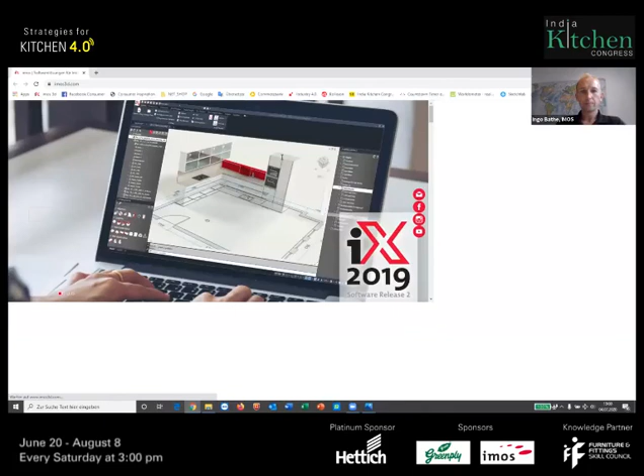For this, I just open a browser, and we have a password and username where I can log in. This browser, or the sales option, can be used on a tablet computer, on a smartphone, on a computer worldwide — it doesn't stick to a place. You can use it from all over the world because everything is online and you don't have to install any software in this case.

If I like to customize a cabinet in a very simple way, I could just open my basket here and ask for a new one, IKC 2020 for example, and I can create my own basket. Now we can see a basket list, a name of cabinet. I can choose part of my furniture, and I just use a cabinet by itself. This cabinet can be customized according to the catalog content, according to the options a catalog can get.

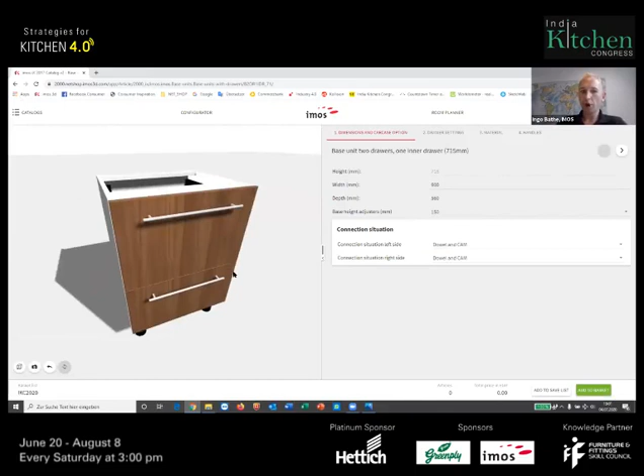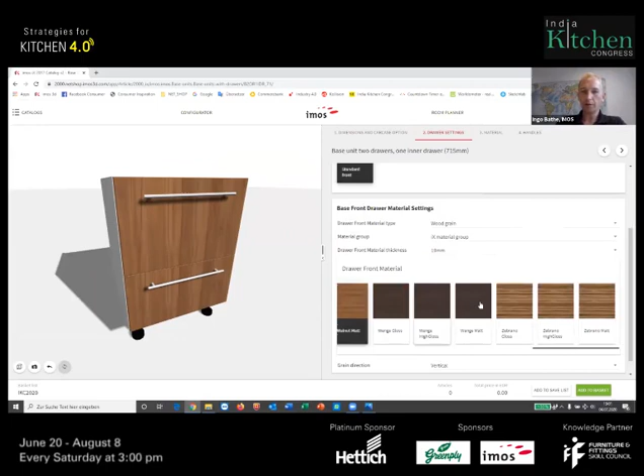So here I can try to make a cabinet which has a size of 888 millimeters. I can change my drawer information, choose a two-side drawer system from Hettich for example, and I can also choose my different panel information, let's say from Greenply. I can choose the different handles.

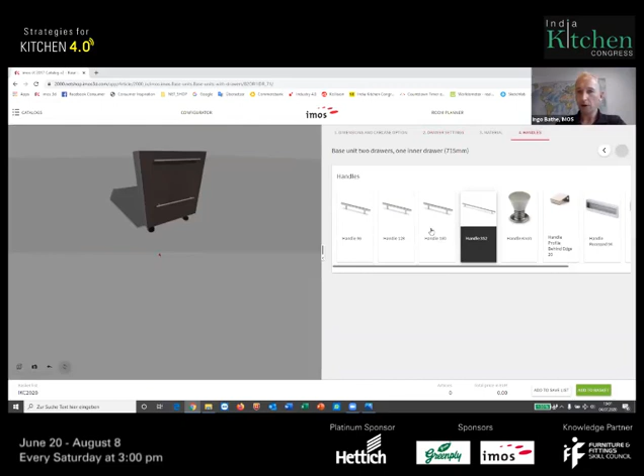This could also be customer specific data — some Hettich handles are involved in this case, for example. Now I can see exactly the same cabinet who has a bigger size like before, and also the internal hardware is changing, because if I change a cabinet from 600 to 888, the slides, the hardware information, and how many kilograms belong to the slides have also been changed.

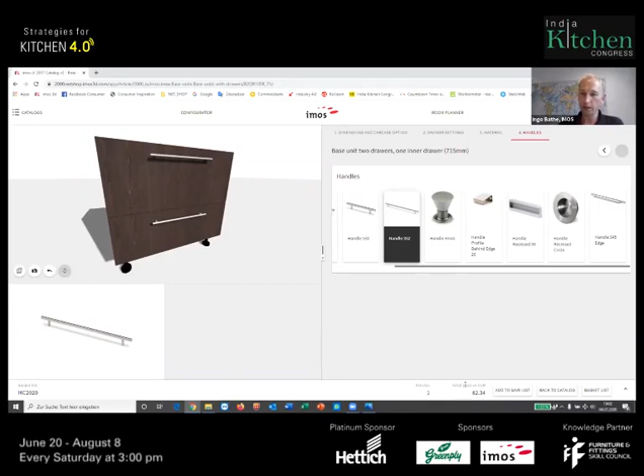I can add this cabinet to the basket, and now I will get an article and also a price for this cabinet automatically according to my new size, new colors, and also my new hardware.

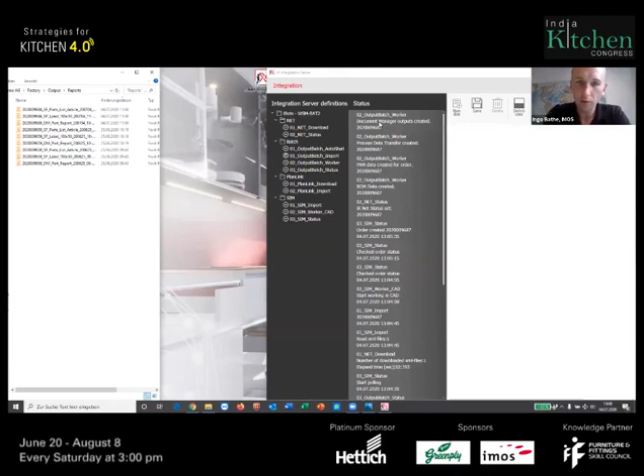It is working like, you can say, a black box. And after it is finished, it will have created all those data. So we can see now in this integration server definitions that we have created the process data, the documents have been created, and now, after the documents, it will create also the reports.

So we can see here in the left folder, in a few seconds, that here are some more reports flying in with the number 687 in the end. And this is totally independent of the production people.

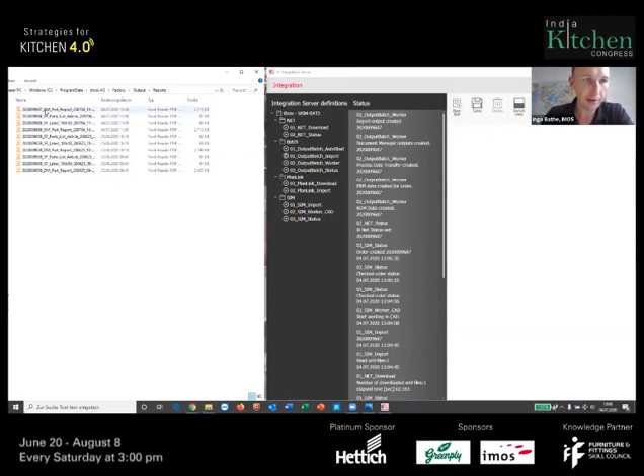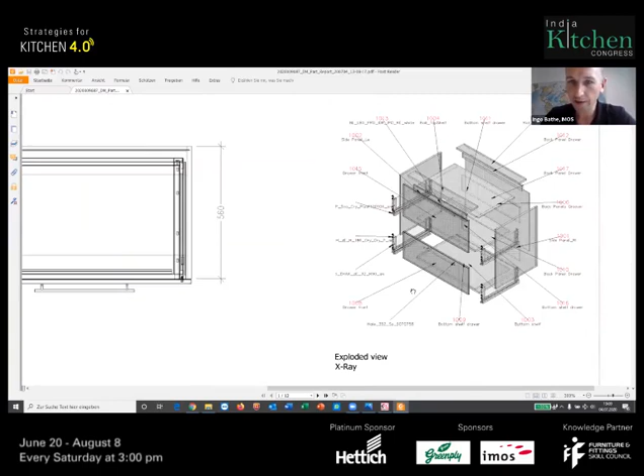So now the first report has been created. We can look here. Here it is, 687. I just open this 687. And here we can see it is our cabinet, which has here an explosion view with all the panels which belong to this specific cabinet. We can see here it has the number according to the online business.

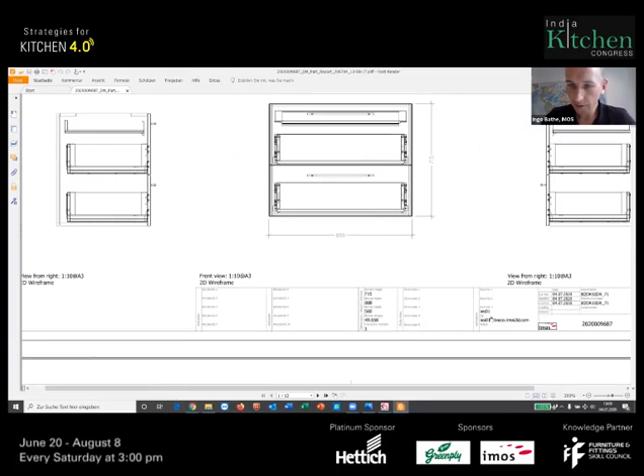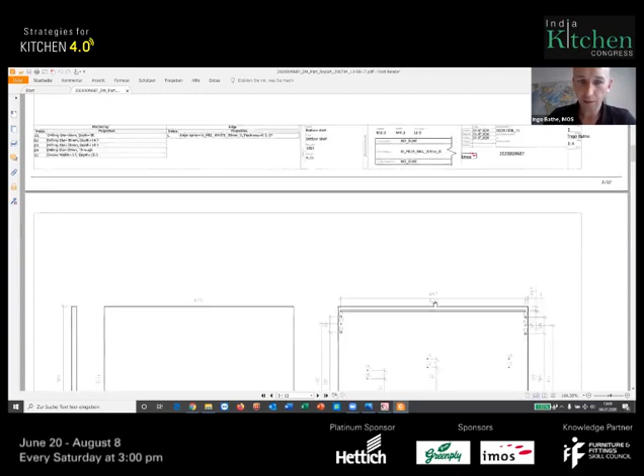We can see also here the specific drawing of the Hettich hardware. We can see here also again the order number, the online user, and last but not least, it will create the single part drawings with all its fittings, with all its drilling information from the internet.

What we can also see is that here we've got the drillings from Hettich. The drilling information is coming from the supplier. So whenever Hettich creates a new article, a new slide, we load the slide in a digital format into our library. And once it is in the library, it also has the technical specification of what kind of drillings are needed, how big those drillings are, and how they are positioned. And once we have this in a digital format, we can use it online or in our production all the time.

So here we can see we have here barcode number 1001. If I go back to my CNC files and open this 1001, here is the 1001 created today at German time 106. I can open it.

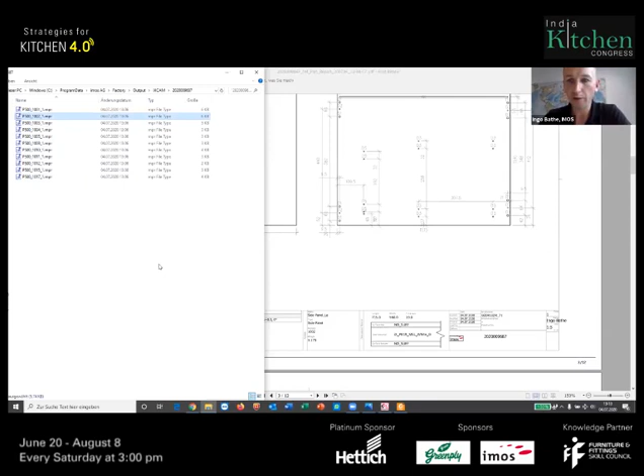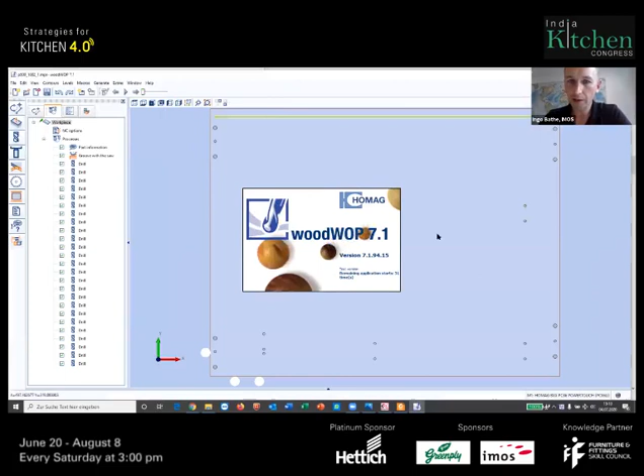And Imos will deliver those data directly to all the machines which are part of the customer's production site. In this case, I have used a Homag machine. Here we can see that those drilling informations created from Imos have been delivered to the CNC machine with all its specifications.

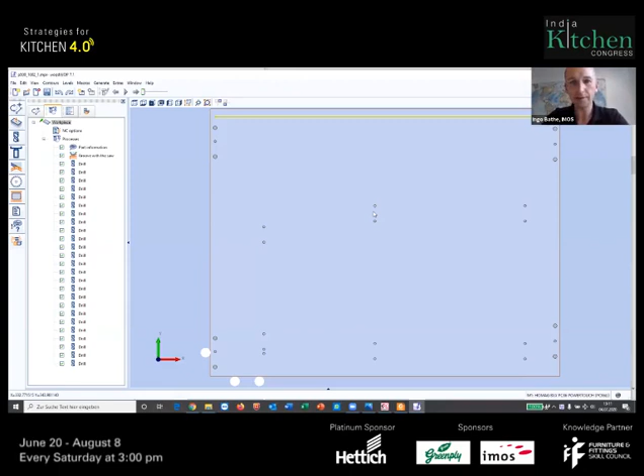So here are the drilling informations for the CNC machine. These drilling informations are linked from the supplier industry, Hettich, to the database of Imos, and from the database of Imos to the sales option, and from the sales we get the specification of this specific cabinet, the customization, and we get back the process information for our production.

This is a small way of how to order online cabinets and get these files automatically downloaded into the production site. It is just one cabinet.

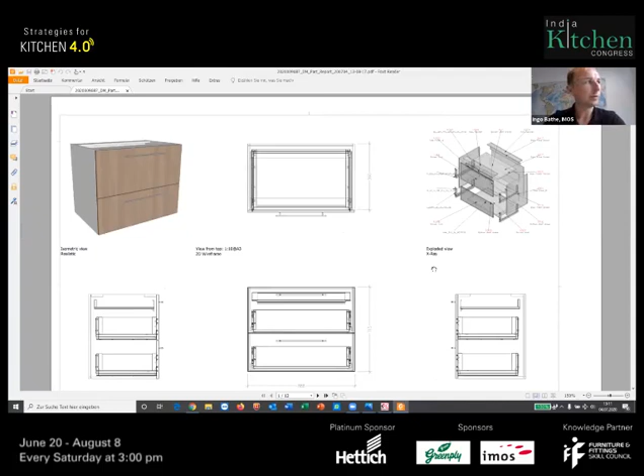The next thing I'd like to have a word on, I was showing here the online shop, customize a cabinet. We also have an offline shop, let's say a solution for a shop in which we can have much more options. This will now be the next option specifically for kitchens, because we are talking about kitchens today and how we can increase efficiency in kitchens.

For this, again, I start my software, which is now installed in my computer. In this software, we have all the options of a room planning function, of a customization of a kitchen, and also of just designing something which is unique, which belongs to our customer.

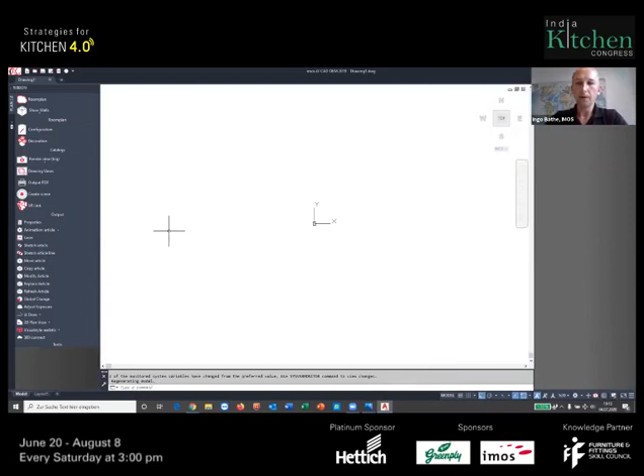I just have to organize my frame a bit. The first thing I will do is, if I like to start designing a kitchen, I will start with room planning functions. In this way, Imos offers a lot of options. We can create a new room, use a polyline from an architect or information from a customer, make a rooftop, make single doors, walls inside, as well as corners, chamfers, and so on. All these options are available, but to keep it a bit easy, I just start with a single floor plan.

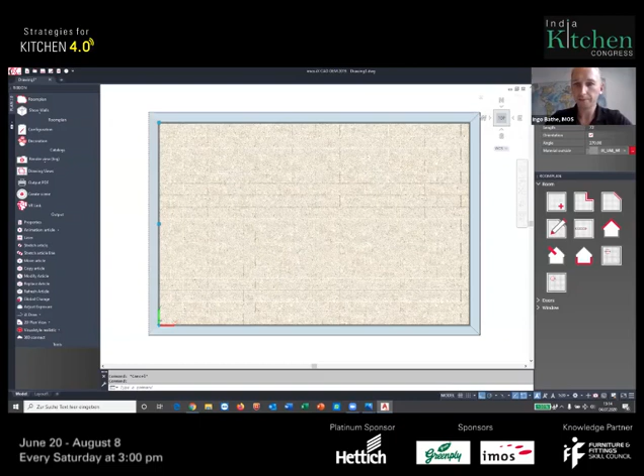I can change here my floor material according to my list. I have a lot of options available - I can have a carpet, a beech flooring plan, or Italian tiles - and I can tick to my different walls and modify it. Let's say 7,250 millimeters for the length, and the same I can do for the width, 5,500 for example, and automatically it creates the room.

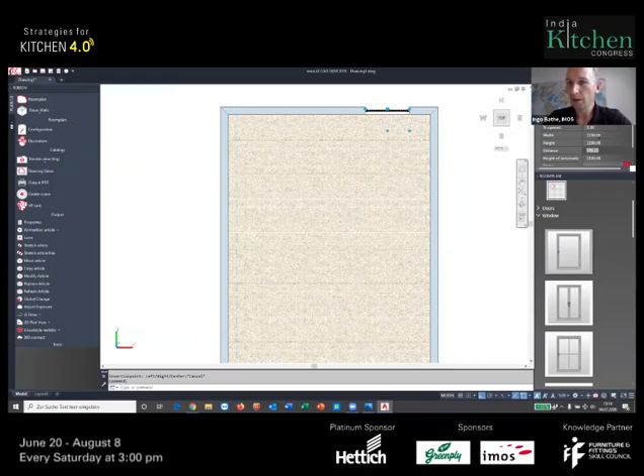The next thing we need is a window, for example, inside. I just tick to a window and place it into this room. Same with the window, I can modify its position, let's say the distance to the wall should be 950 millimeters, so the window moves along. And the width of the window, let's say 900 millimeters, and the height, and so on.

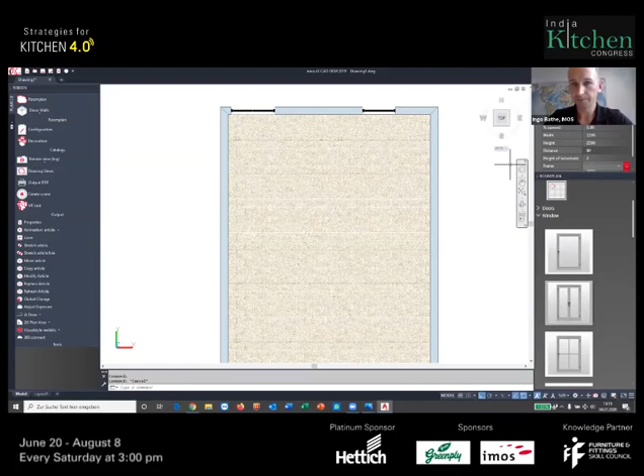I can add on some more windows inside. I can tick to the window and say this should be a much bigger window, a walk-through window, with a width of 1.2 meters, for example, and a distance of 80 millimeters. Whenever I have set up this window, I can multiply it along my needs.

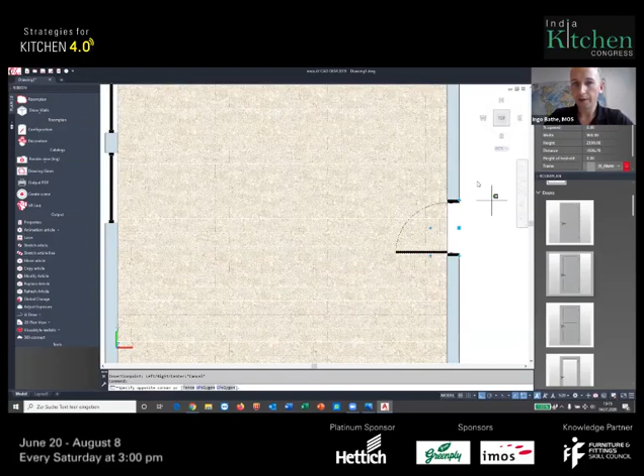We can set up a door inside and have a door involved. Again, I like to change the door from the left to the right side, and in this way I have my room available. Quite simple, quite easy. I can tick to the walls and change the different colors if I want to.

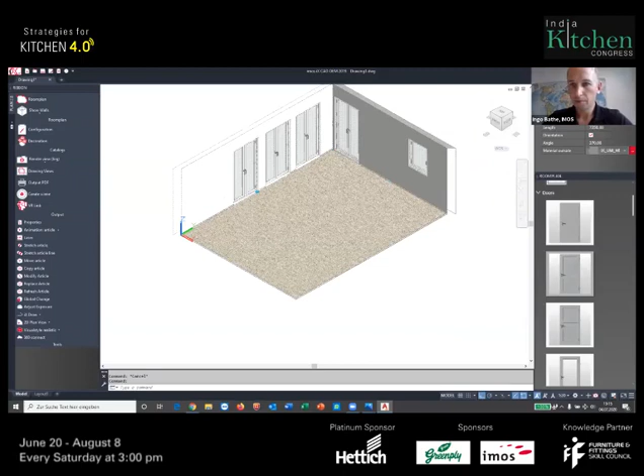And in this way, I can customize a complete room. Next, I'd like to involve a kitchen.

For this, we just open our configuration here. Now the important thing is that in this kitchen we have exactly the same units which we have seen online. Remember, when I start the online configuration, I just choose a base unit—exactly the same data can also be used in a shop. So again, we have one database with all the information from the supply industry as well as the machine industry and our product portfolio, which are flexible in size.

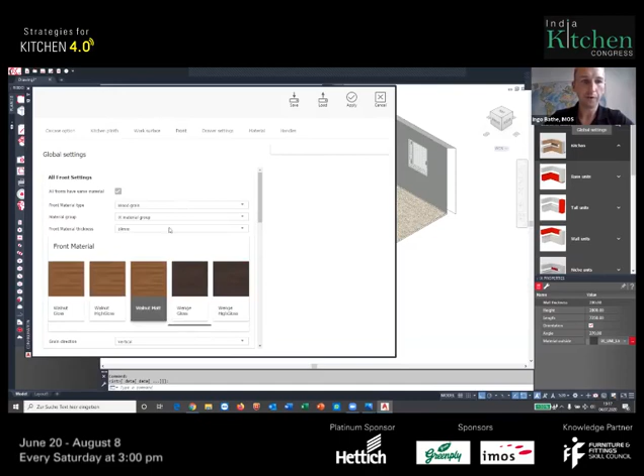The first thing I can do is set up some global settings. I can say I'd like my kitchen plinth in a white panel, and choose different types of surfaces for my worktop: stone, metal, wood grain. I can also choose the type of door or front material—here I'd like some high gloss, let's go for lava, for example. I can choose my handles and save this. Now this is my pre-definition of a kitchen.

Now if I'd like to make a kitchen inside, let's say we have a kitchen line plus an island, which is quite interesting. First of all, we very often have the case that we have some installations like water pipes and so on.

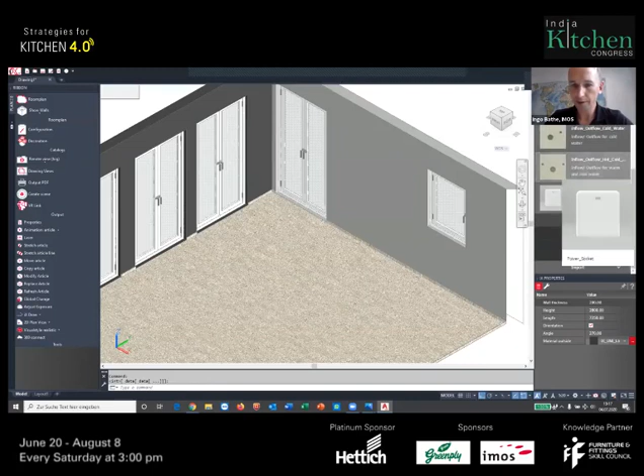For this, we have to go to the options of the wall installations. Here you can see all these installation points. So for example, we can set up a wall installation for water and for gas—important for my installation team later on. The same I can do with some sockets, so here I have some sockets available.

Like this one here. And if I'd like to start designing my kitchen, I go to my catalog and start using, let's say, some tall units. So I can put in a number of the sizes and it automatically starts with the tall units numbers.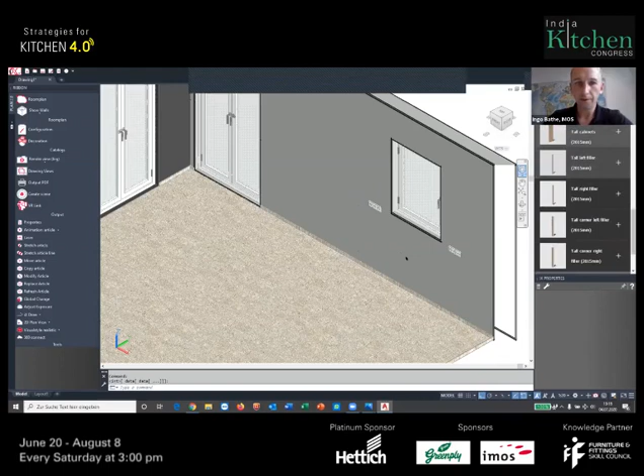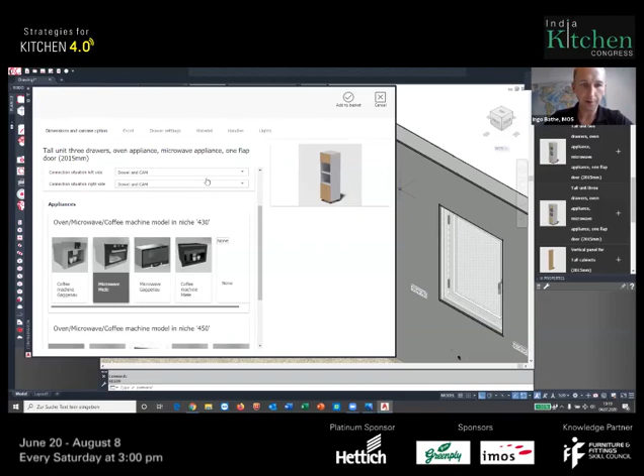I can add a panel here, for example, and place it to the wall, and now you can see it comes in a white color according to my pre-installation. I can choose another cabinet here—I'd like to have a coffee machine involved as well as an oven. This unit should also have some lights on top, and then I can add it to the basket.

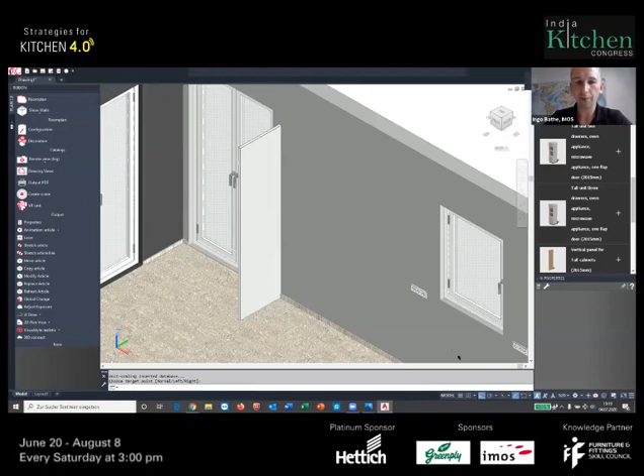And now, as you can see, it automatically flipped together. This way it makes it very easy for us to create this kitchen out of my standard library. And now we also have my high gloss lava panels involved, and here I have my cups, which are part of it.

I add one more tall unit cabinet, and one more side unit, a side panel, just added to this specific kitchen. And now I fill the gap here with some base units, so therefore I just go for the base units.

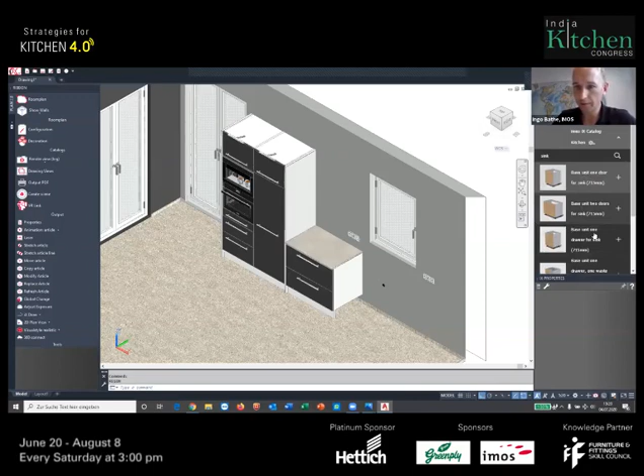And now next, we have here the water pipes, so we have to have a sink installation. Therefore, we ask our catalog, do we have a sink? And then it will list all the options for a sink. So I just choose this sink unit, make it also 900, and I can choose different sinks according to my library information, and add it also to this kitchen.

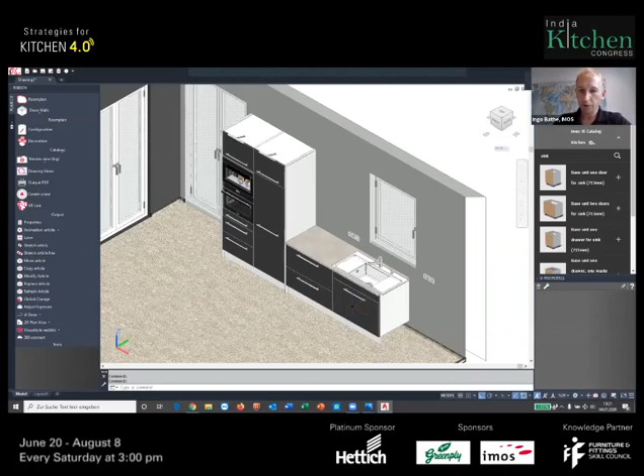And now next, we can see it also gives us a cutout for these appliances automatically. The next thing is I have to fill the gap to the wall. First of all, we have a laser option for this to measure the sizes.

1085—so there it would be interesting to have a cabinet with 1 meter, and we have a filler. So therefore we go for 2 drawer units and ask for a meter cabinet, add it to the basket.

And then we'd like to have a filler involved in, or we just keep the gap, or we just fill it with an additional panel. In this case, I just ask for a filler—there is a right side filler, should be 85 millimeters. I add it to this kitchen, and now this line is complete.

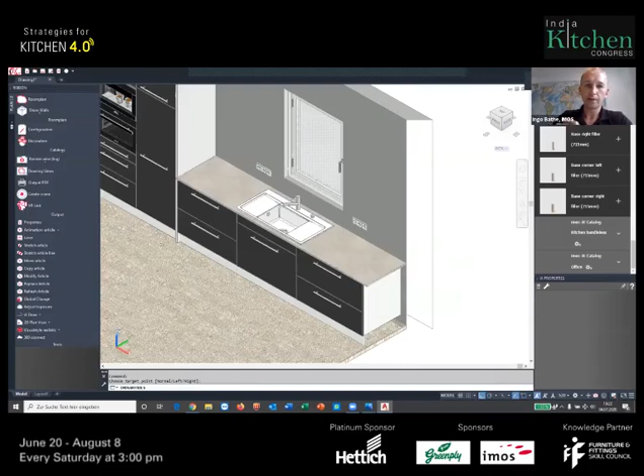The next thing is, I'd like to have some wall units here. Let's say I'd like a glass unit, so I use my wall unit catalog with 2 doors or with a flap unit. We'd like to have some lights involved in, some spotlights underneath, as well as the same lighting on top.

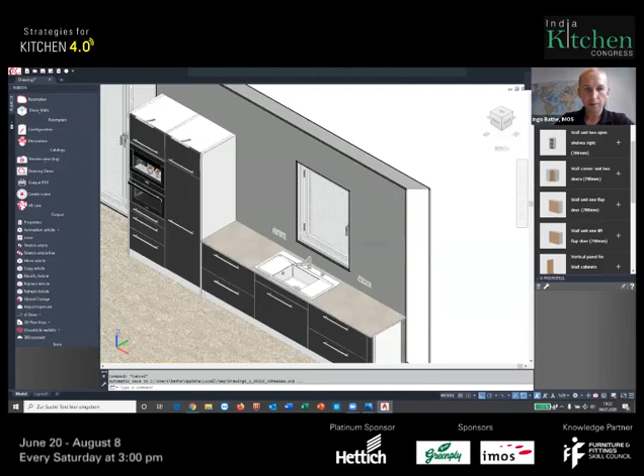I have to move this article. And I would like to have different door materials. So again, we can modify this article here and ask for some glass doors. Automatically, the logic says if I have a glass door, the glass shelves are also involved.

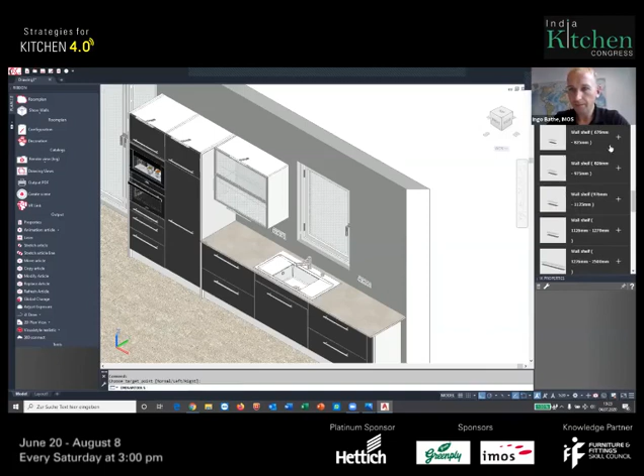And then I'd like to have some shelves also involved in. Look for some wall shelves, number 1 and number 2. And now my first kitchen line is finished.

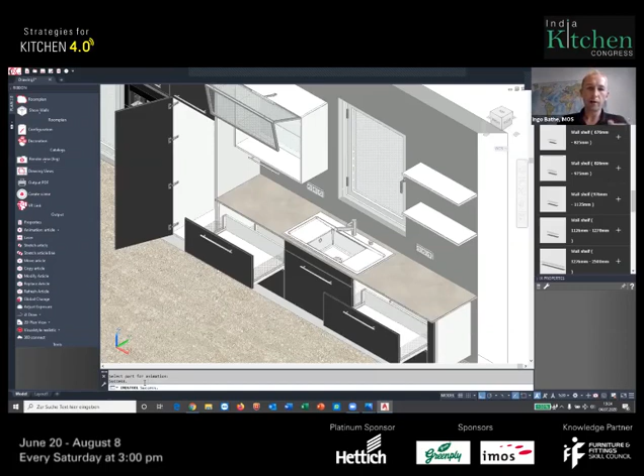Of course, I'd like to have an island too. But what we can do right now is also have a look at what kind of hardware is involved. Here we see there's some Hettich hardware with glass panels involved. We can see the way the door opens, so here are the Sensys hardware involved. We can normally open each and every cabinet and see the movement of the hardware. This way we can demo to a customer how a kitchen looks and how it will work in future.

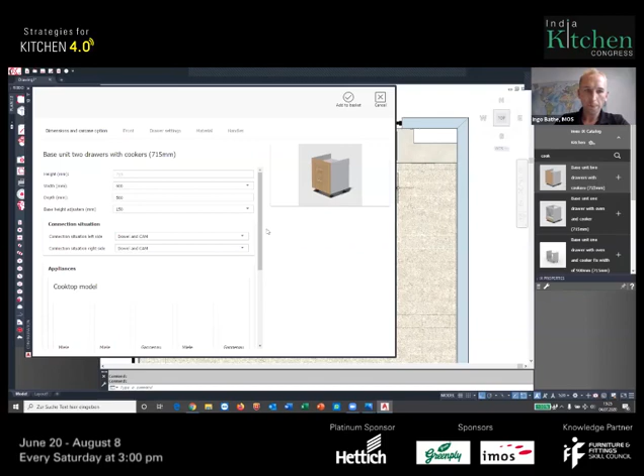I close the articles, and now I'd like to have a kitchen island with a cooking field involved. Therefore, I just go here for a cooking field. It gives me a unit with a cooking field. I can use a Gaggenau, a Miele, a SMEG, or a local one. All these appliances could be loaded into the software.

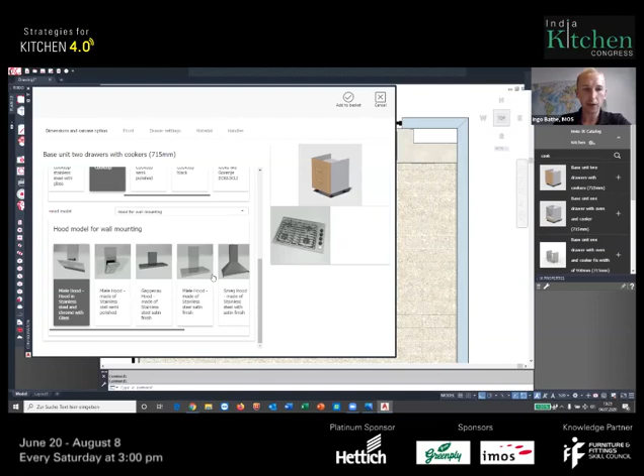We just choose a hood. And finally, we create our island. I place it into the kitchen.

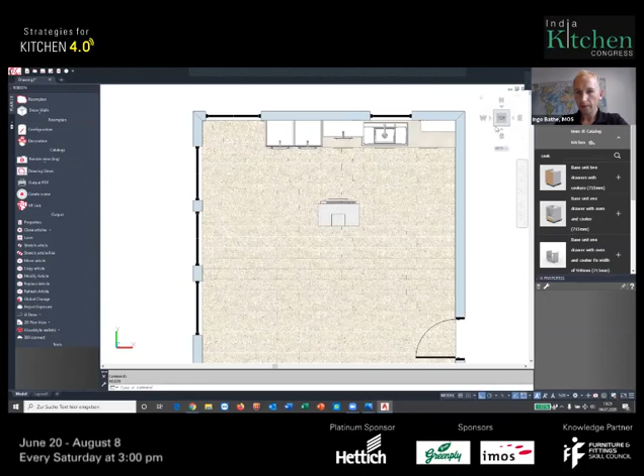Then I just fill it with some different additional cabinets. If I click the plus, it comes in with a standard size of 600. If I click the name, it opens the configurator to have different sizes involved in. So plus is the quick option. Another way is I can open it, and then we get the configurator where we can still change sizes.

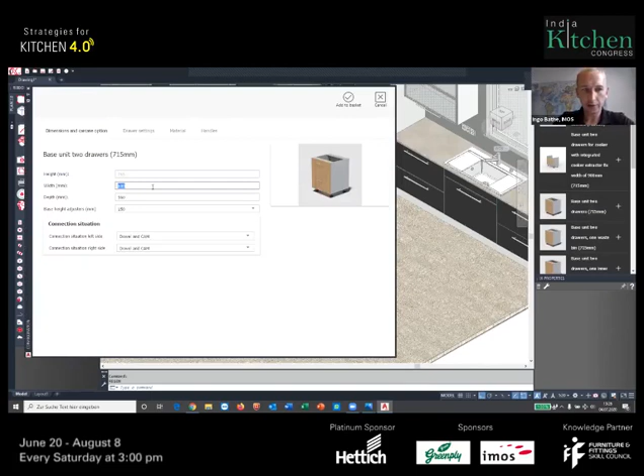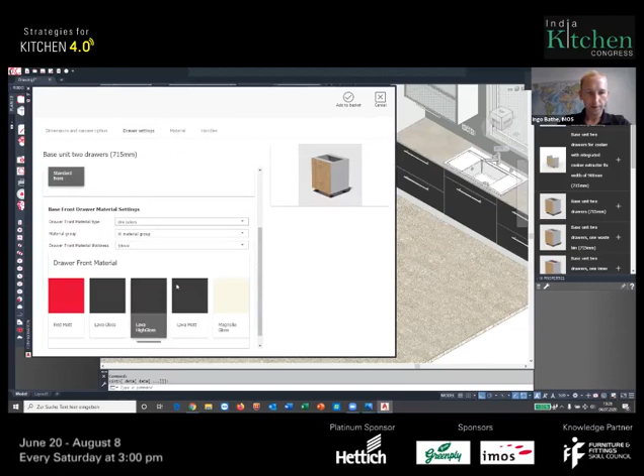I'd like to modify this article to have different material involved in. Let's say some Magnolia front material involved in. So this is now different from the other one.

And I'd like to have one more cabinet with the same configuration, so I just copy this article instead of opening the configurator again, to make it much faster. What we can see also is that the worktop moves automatically.

Finally, we ask for a side panel. We take out this panel here and change sizes according to the island. Just flip it in here.

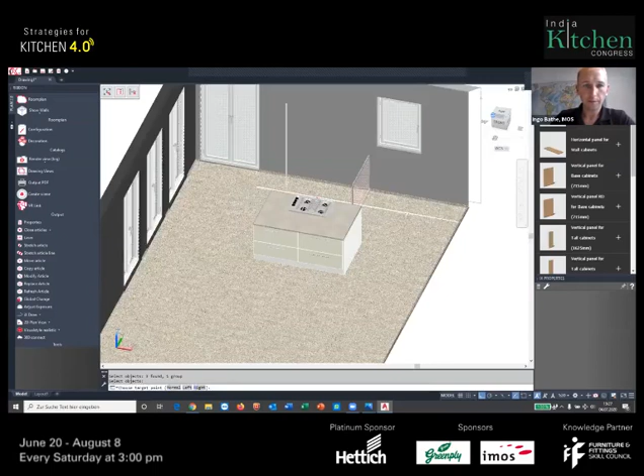And we copy the article and take it over to the next side. And finally, we are finished.

We missed that we have to have some electrical points as well, so I go back to my installation points. I'd like to have some sockets as well, for the cabinets as well as for the wall unit, in order to have the lamps involved in. And now I'm finished with my kitchen.

What I can do now is decorate it and do something more to make a nice rendering. We will do this for a short minute.

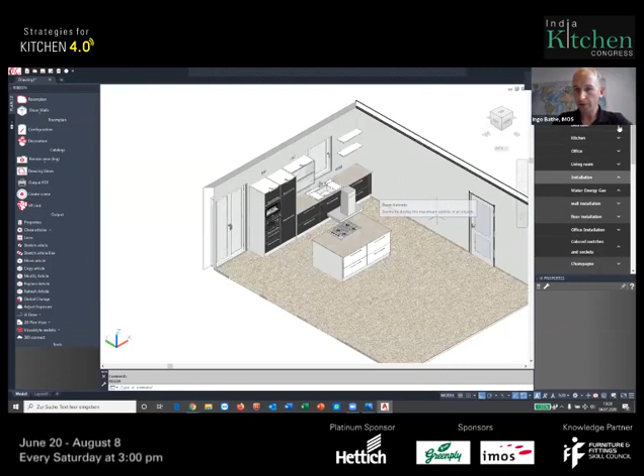We just go for decoration, for example, and ask here for a kitchen decoration. We'd like to have a dining table involved in. Let's take this one here, so there should be a dining table.

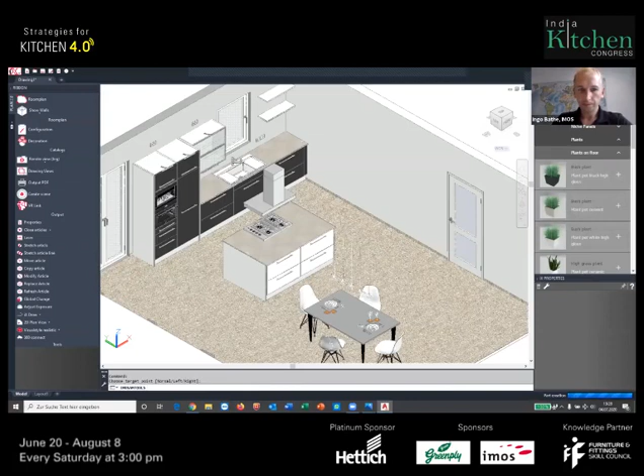We'd like to have some plants on the floor. Let's go in and make something nice on top. We have some cheese here. We can also have an imos cup, it's a good one. Some fruits, and a magazine. And then we finish with our design.

And we do our installation information first. What we can do now is make a short rendering. For this, quite simple, we just walk into the kitchen here.

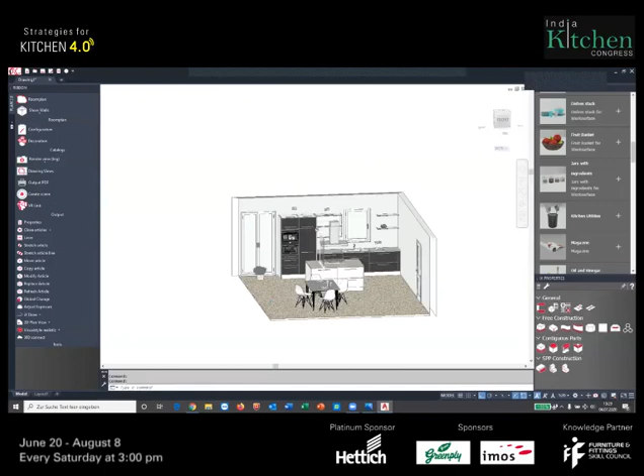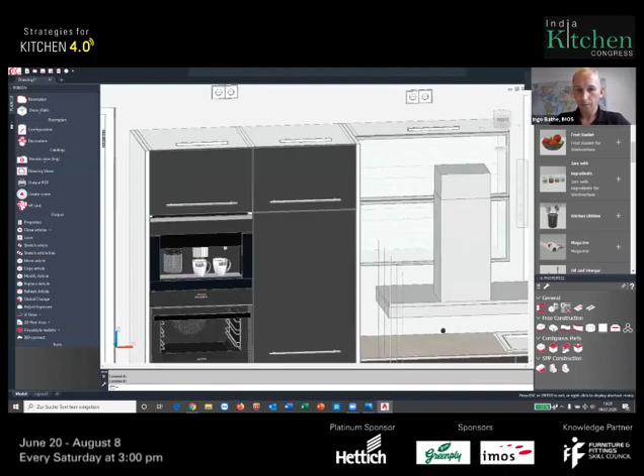It was wrong in position. And we just change our view from a parallel to a perspective view. Therefore, we can have the kitchen here, and we'd like to have a rendering involved in.

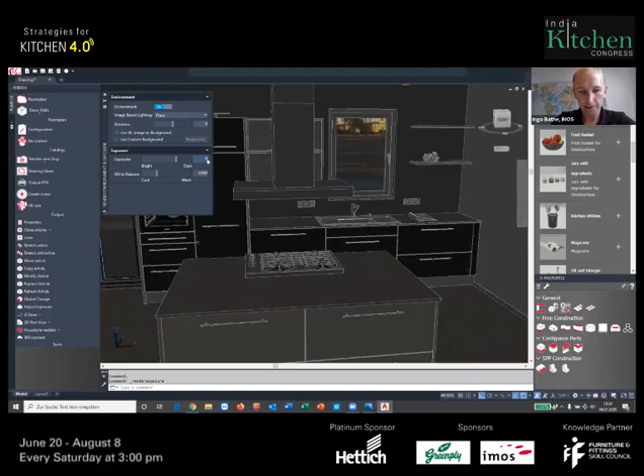What we can do is adjust the rendering a bit. We can ask for an environment, so we get a background picture. Here we can choose some of them. Let's say we have a brightness setting, and we can also change here the intensity of the sun.

Then we just ask for a rendering. It's just a snapshot, a very fast one, to get an idea how the kitchen could look like and how this kitchen will look in my own environment. So it is only for making a fast, quick picture.

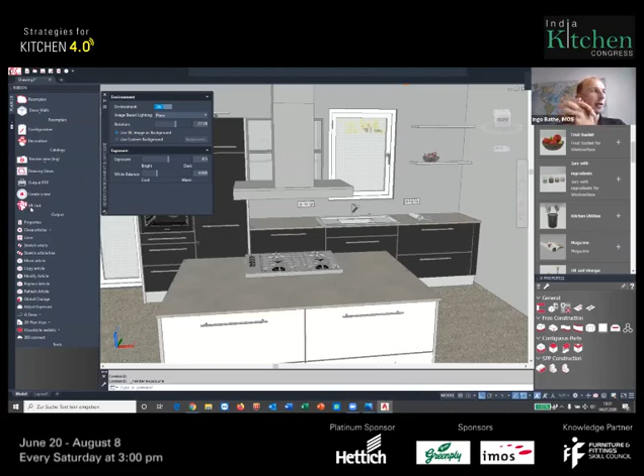And then last, we also can link it to the VR glasses and share this also via this VR link to the customer's mobile devices, to the customer's houses, and give him through other opportunities, different solutions in order to have his kitchen available on a mobile device.

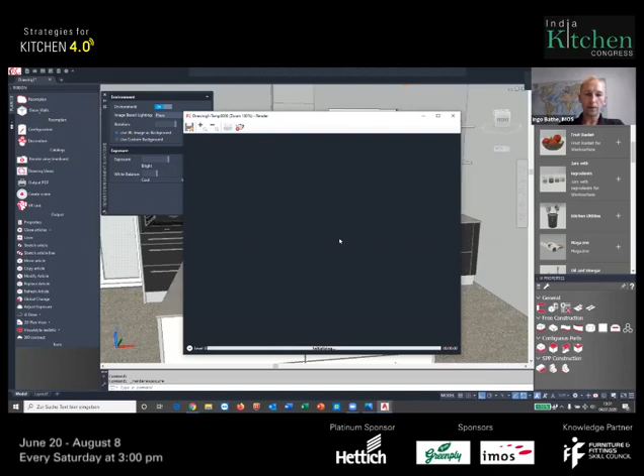Now the rendering will start in a few seconds to just get an idea how this kitchen could look like. There are 5 levels of rendering available, and the picture comes up in the meanwhile now, and it becomes better and better, the resolution of it, by running the time.

And then we have also this kitchen here with my appliances, with my different colors of panels, with the lights from the top, from the oven, or from the hood here available. You can see also in the background the shadows of the cabinet spotlights. You can see also here the brightness of the top lights. So all these options are available in getting a rendering.

And this rendering time lasts around 2 minutes. And then there would be just a pre-shot. Of course, we can change the resolution up to HD format and add some more kind of decoration inside to have a much more realistic picture available.

But I think for this small demonstration today, it is interesting enough just to get an idea how the rendering works and how this way of rendering takes time.

Important thing is also here, what we have mentioned today, the time to the market. So the question, how long does it take for me to customize such a kitchen? And also, how long does it take for me to make a quotation out of it?

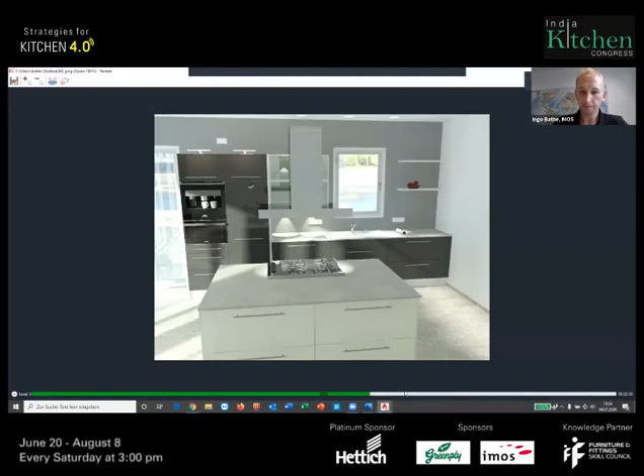I go back now to one important point, which is very important also for the industry: that we are able now to do our important elevations. For doing an elevation in Imos, there is a quite simple way.

We just click on this button here, drawing views, and then Imos will automatically generate all the plan views, all the elevations with all dimensions and sizings.

And finally also, we will see in the elevation all the naming, all the position numbers for each and every cabinet. That also gives us a list, a delivery list of all those components, which can identify which cabinet belongs to which position in the kitchen.

So all this information which is needed for the installation teams is also on demand available after doing these specific drawings. The first that comes out will be the floor plan.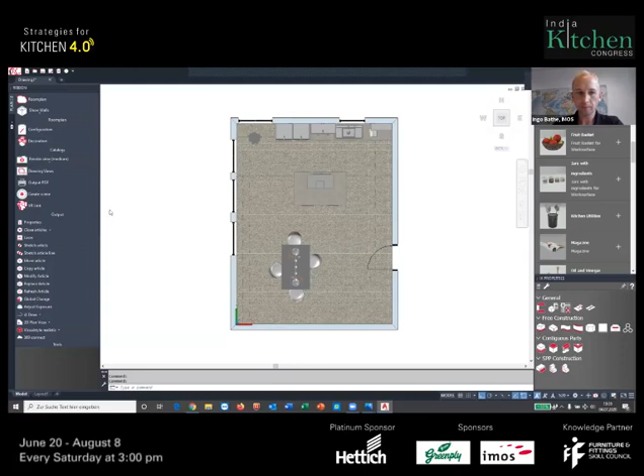To do these drawings, it takes roughly 20 to 40 seconds. But what we see now is we have here the floor plan with the sizings available.

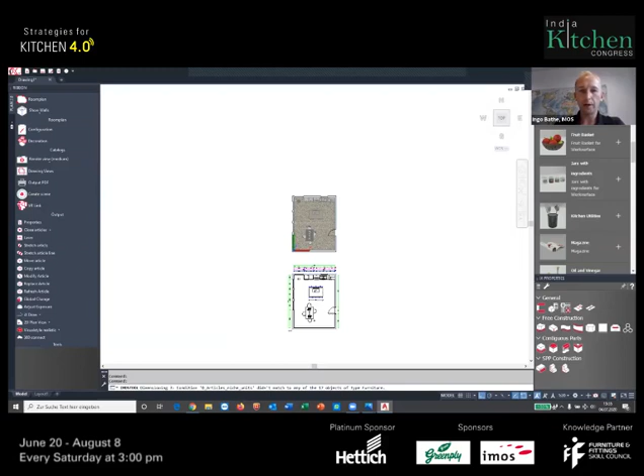The next will be the elevation for all the 4 different walls. And then we also can have an electrical plan with the power sockets and with the water pipes involved. So also this is something which is very important for the kitchen industry.

It is not only to design a kitchen, they also need the information where we have to place the power sockets and where we have to place which and whatever position from these cabinets has been done. So it is very important to give all this information to every party who is in charge.

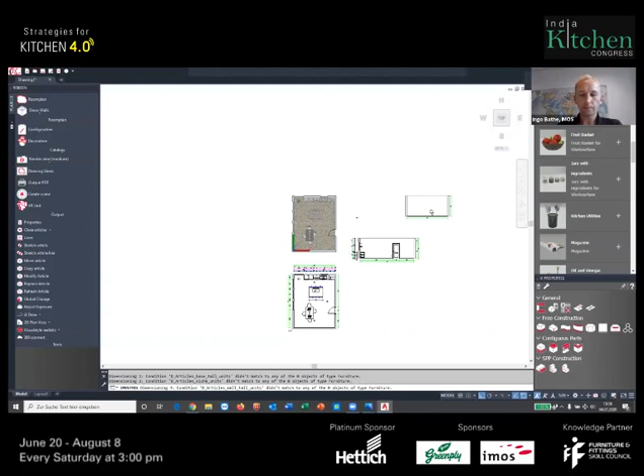So what we have seen now here, Imos also generates the drawing frame, and we have all those drawings now on demand available.

And if I just look at my timer, it took me 10 minutes to create a kitchen, to get a rendering, and also automatically to get these drawings available.

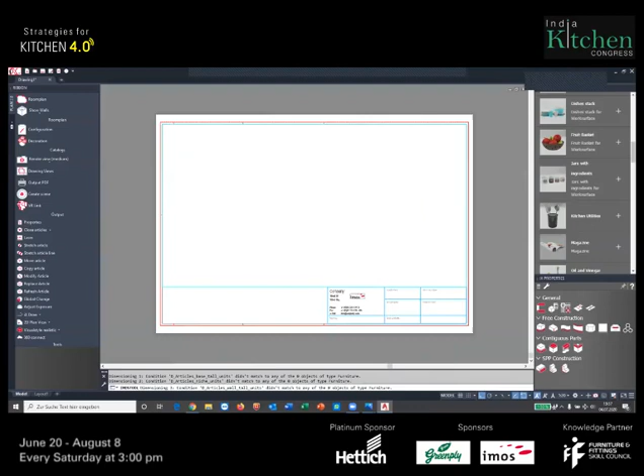We can see now here in the lower line, we have all the views as a layout. View number 2 with the windows, and then of course the different views with the floor plan, with the elevation of the kitchen, and all this stuff comes out.

So now here we have the plan view, view number 1, view 2, and so on. I just would like to go to this floor plan. What we see here is that we have in a blue line all the base units in sizes plus the panels in between, and in black line all the sizes of the worktops, in magenta the wall units involved, and in green the sizes of the room.

Same happens also for the island, and if I look here to view number 3, it is also available in this drawing. Automatically, what we can do is we can annotate a view.

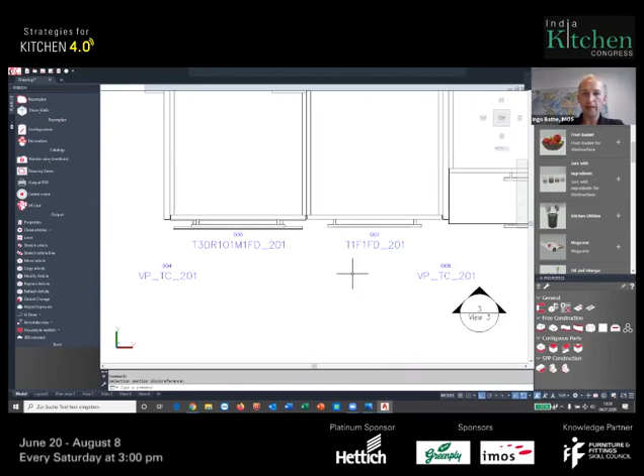In this annotation, I could have here the information of what kind of modules belong to my kitchen. So automatically we can see position number 5, position number 7, position number 8, and these are the names of the cabinets. All these positions are declared in this specific annotation.

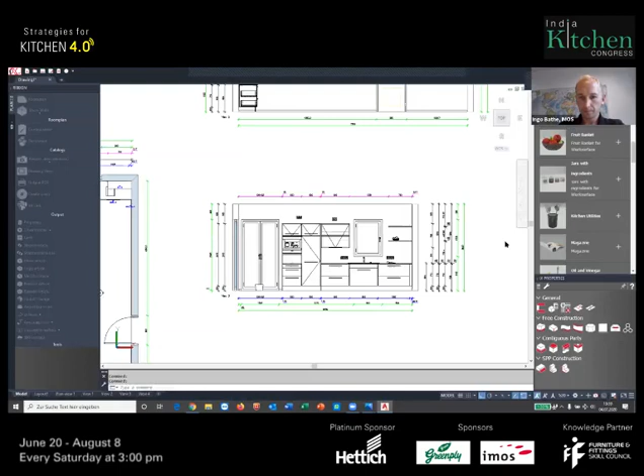The same we can do is also annotate a view, an elevation. And then the same happens with this elevation. We've got the namings of all those cabinets plus the position number.

I save now this kitchen. I give him a name, IKC 2020. We can generate automatically the CNC files for the machines. We can ask for the barcodes. We can ask for all the information of my production, and automatically it starts saving those data.

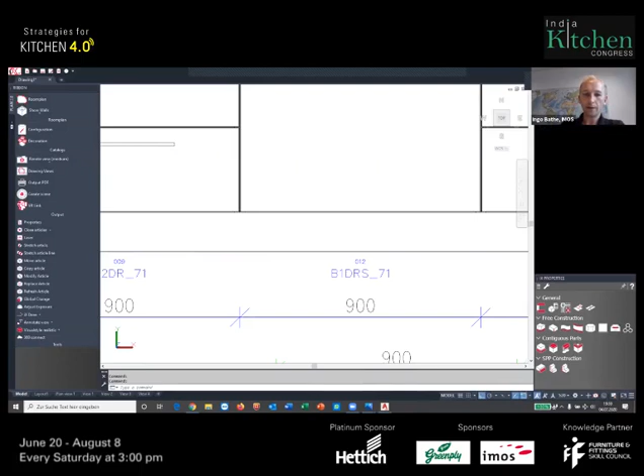Meanwhile, I start my organizer, and in the organizer we can see exactly how much consumption of hardware is involved. We can see also the quotation with the rendering, how many panels we have to purchase, and how long it takes for my production.

Whenever a sales manager shares this kitchen design to the factory, it comes via the integration server into his computer from the production. And then we have in the order management a new folder, IKC 2020. We can see here also the kitchen units in this line with specific sizes.

We can add here, if you want, a customer name, we can add here head data, let's say a commission number, and processor, Ingo. You can save this. We can ask here for a specific picture from the rendering.

And of course, if we want to, we can calculate this kitchen. It will calculate the complete kitchen with all its hardware, with all its time for production, and also with all its customization. Then we get a price for this kitchen plus the prices for the appliances. And once this is done, we will have the quotation, we will have all the information of the purchase, the fittings, and also consumption of all that information in my library.

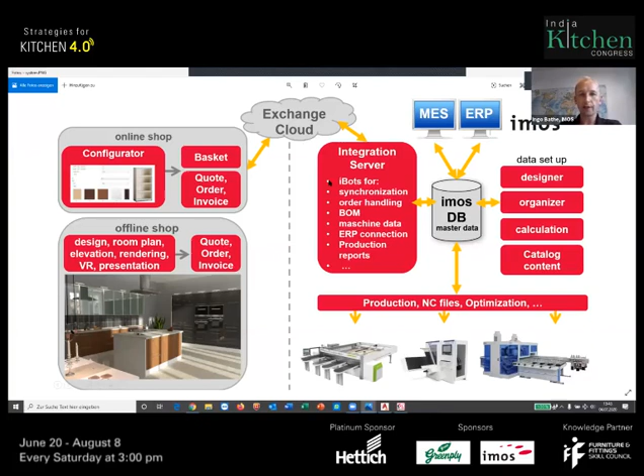So now we have a price here. We have the head data of this specific kitchen. We can ask now for a loading list. We can ask here for the quantity survey, for example. We can ask for so many questions and reports, but we like to have also here a quotation. We just make this purchase information also visible, and then now we can create those reports.

This is quite interesting for the designer as well as for the production team. Each of them can get its own reports which are specific for them.

All the reports can be saved as a Word document as well as PDF and Excel. And once these reports are finished, we will see first of all the quotation for this specific kitchen.

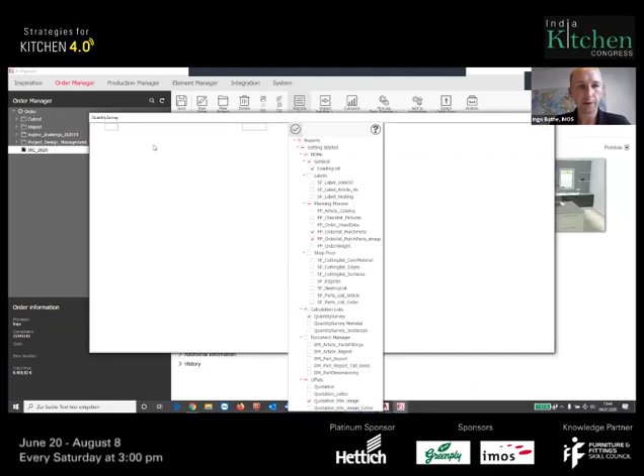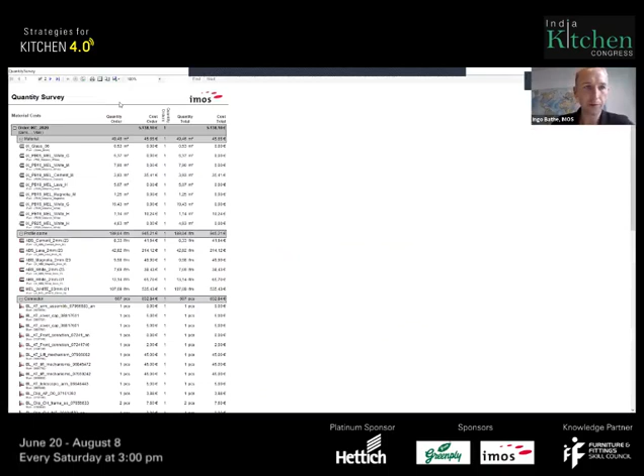And we've got a final price. The next thing, which is very important for the purchase department and interesting as well, is we have here the consumption of this kitchen. It has a consumption completely of 49.46 square meters.

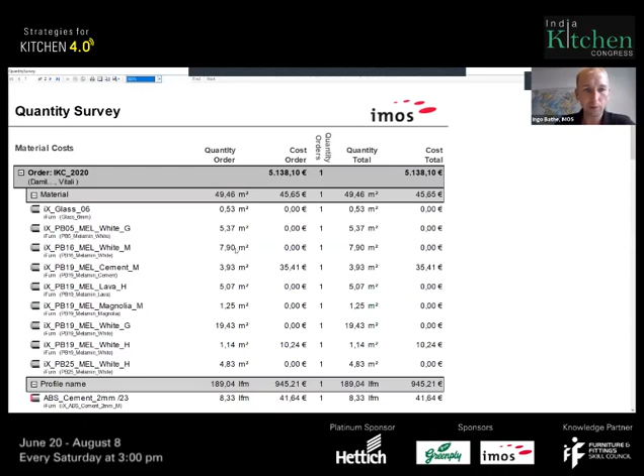There are some glasses involved in. There are melamine whiteboards involved in, 5.3 square meters. There is 16 millimeter wide, and there's of course 19 millimeter wide. We have here 189 meters of edge banding involved in. We have all the hardware involved in from the different supply industry - there is Häfele, Hettich, also the other partners involved in. So it's a mix of all the suppliers.

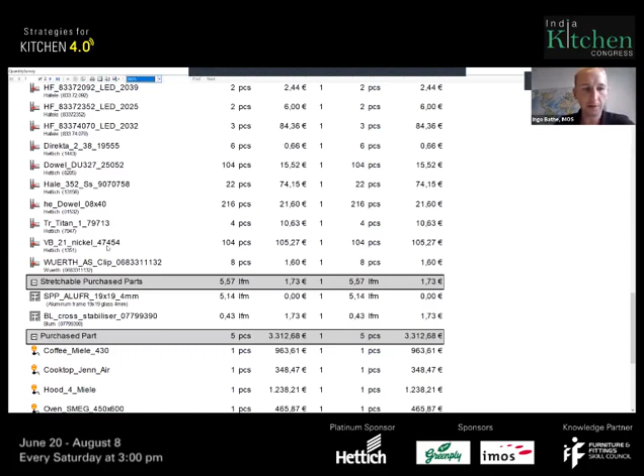We can get here also the purchase parts like aluminum frames for. And finally it can also give us a number of time for production - how long does it take for this specific kitchen in order to produce it. And if we have a time for production, we can also estimate a cost calculation for production. This cost calculation is also part of the quotation. So it's not only how many fittings and how many handles are involved on panels, square meters - it also recognizes the cost calculation for production.

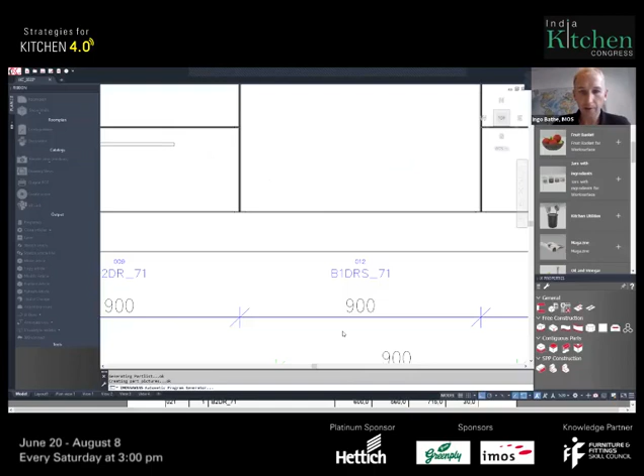Finally, what we also get is the loading list. Here, very interesting to see is that we have the position numbers, the article names, and the position numbers are also the numbers which are in my drawing. So here I have position number 12, B1DRS - this is a cabinet. And the same article we can find here, number 12, B1DRS, and here's the size for this specific article. So we have the elevation and the loading list, and together this is quite easy for the installation team to bring the kitchen cabinets into the right position.

Finally, we can export the data. We can add it to the production, then it will also be part of an MES solution, or it will just use the Imos data for production. And then we can also export this kitchen via a VR glass link to the customer, so that the customer can see and feel his specific kitchen design.

What we have seen now in Imos is quite a small job - I did a kitchen in 10 minutes. We have seen the floor plan, the elevations, a rendering, and the quotation. This is everything that is needed for a kitchen shop, plus the interaction with the customer.

And on the other side, which is very important for the manufacturer, for the fitting industry and for the machine industry, we have seen the hardware list. We have also seen all the information for the machines, like the barcode and the CNC files, which are available on demand, as well as the consumption of panels. So what we have displayed to you is not only how to design a kitchen - we have displayed a small environment, like an ecosystem, which talks from the customer via the sales manager to the production, which also talks to the supply industry and to the machines involved in these processes.